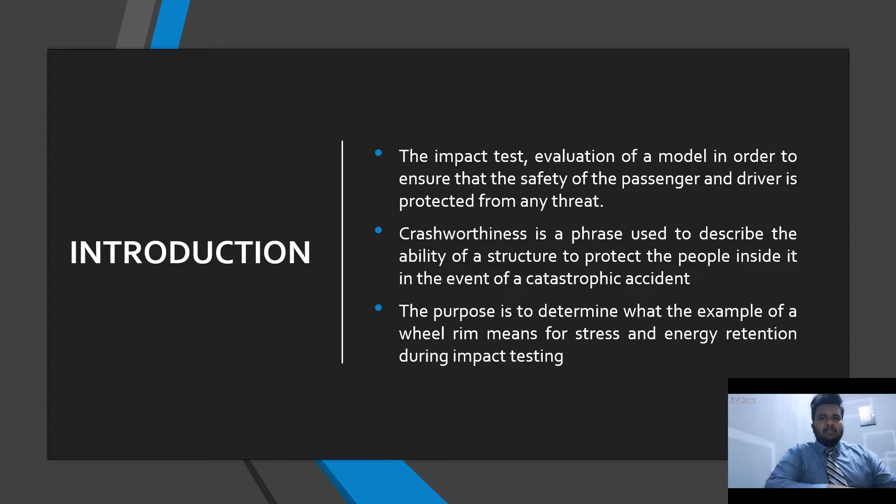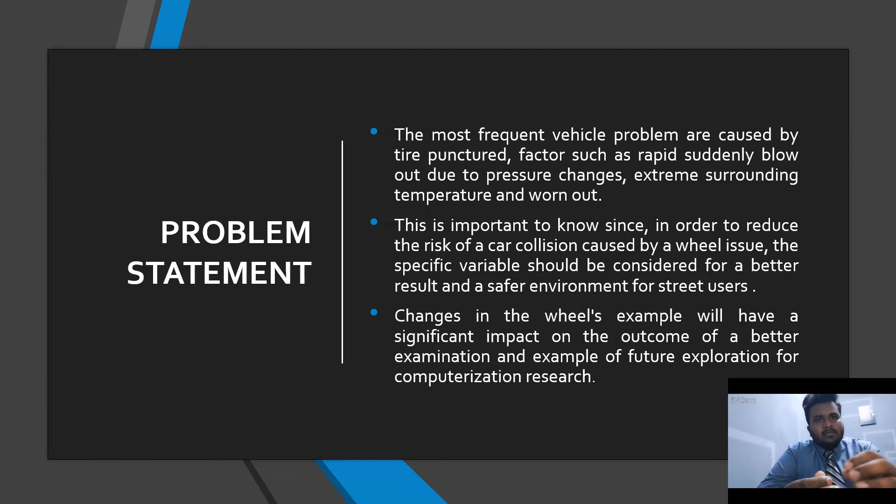The most frequent vehicle problems are caused by puncture tire. Factors such as rapid sudden blow due to pressure changes, extreme surrounding temperatures, and worn out. This is important to know since in order to reduce the risk of a car collision caused by a wheel issue, the specific variables should be considered for the better result and safer environment for street users.

Changes in wheels example will have significant impact on the outcome of a better examination and example of future exploration for computerization researchers.

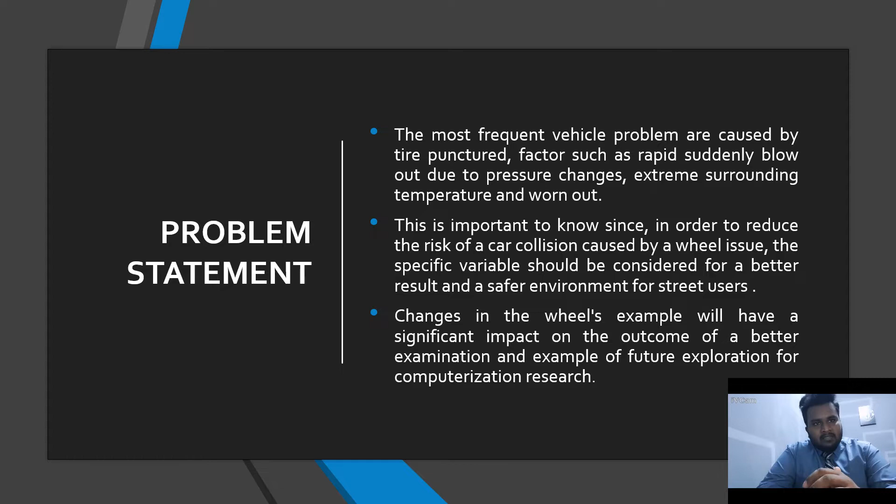The following are the project's objectives. First and foremost, to design the 3D model for alloy rim with a different pattern and different orientations. Besides that, to determine the energy absorbed with impact tests through different pattern and orientation. Last but not the least, to calculate and compare the final results of impact test.

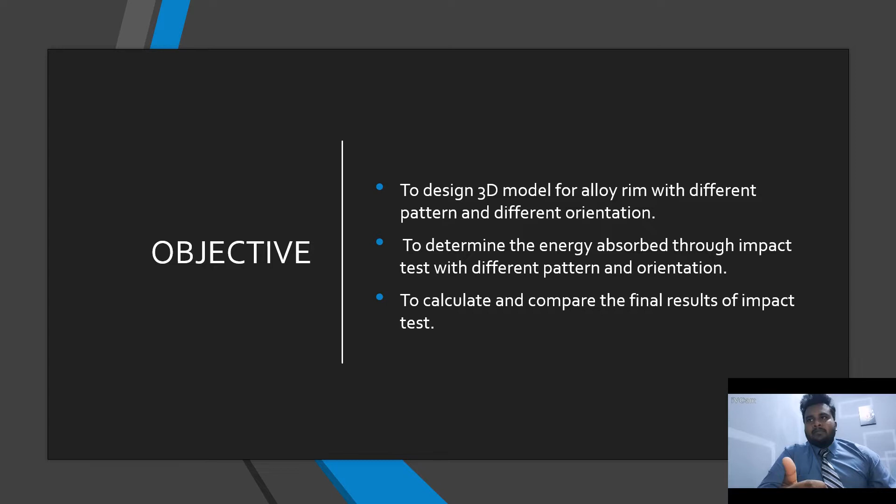The following are the project scopes. First of all, create a model of a wheel rim with a varying number of spokes and dimensions using CATIA V5 software. Then perform finite element analysis with Abaqus software to investigate the project's model.

To determine the amount of energy absorbed from impact test by the wheel rim with various spoke counts and orientations. Lastly, to determine the condition of a wheel rim under different conditions which can contribute to further related study.

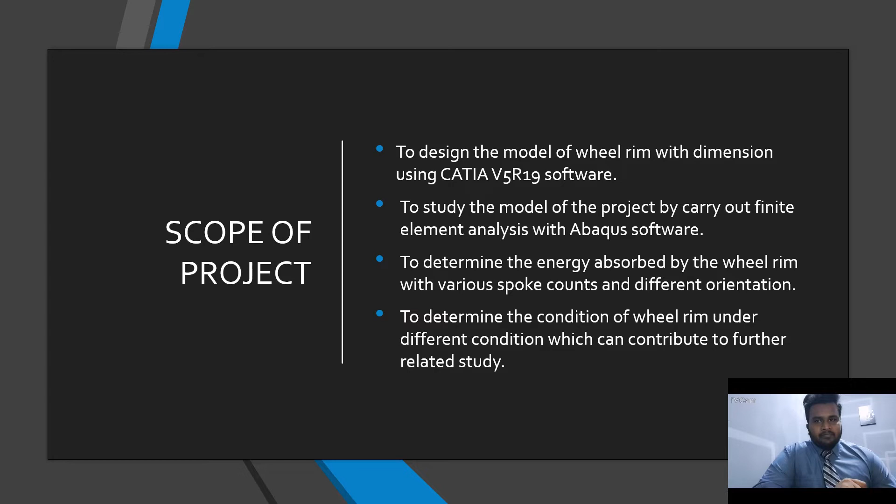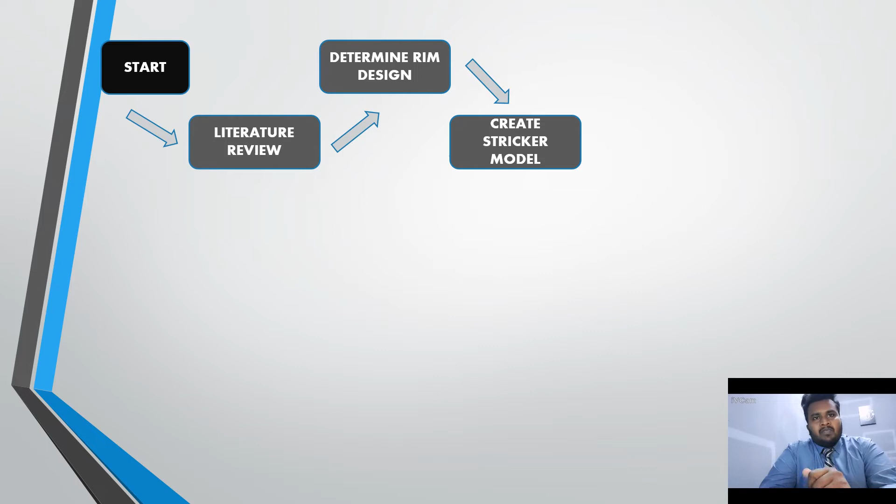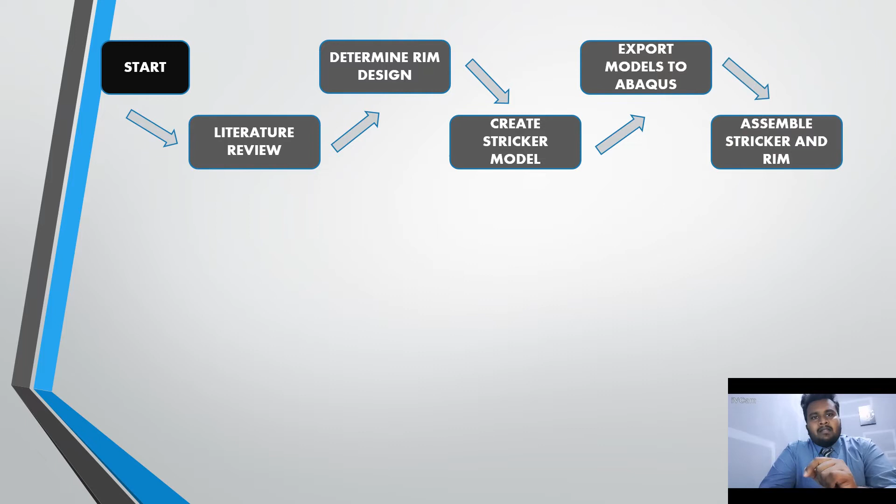Then the next step is to export all the models to Abaqus software. After exporting to the Abaqus software, the striker model and rims will be assembled for the following step. The following step is adding material and then setting all the parameters. Then for the important part, which is the simulation. If the simulation was a success, then we can move to the following step.

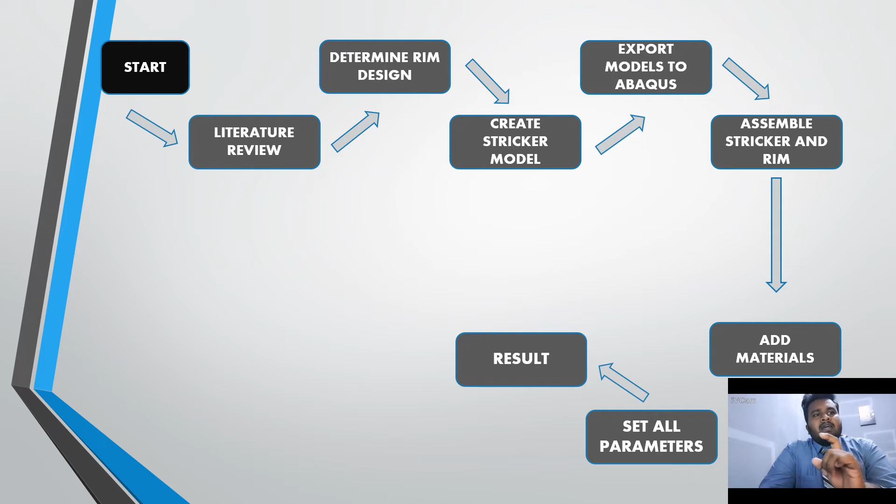If not, we need to start again from the assembling of the parts. If it is a success, then we can extract the results from the simulation for the result analysis. Finally, that's the end of the project.

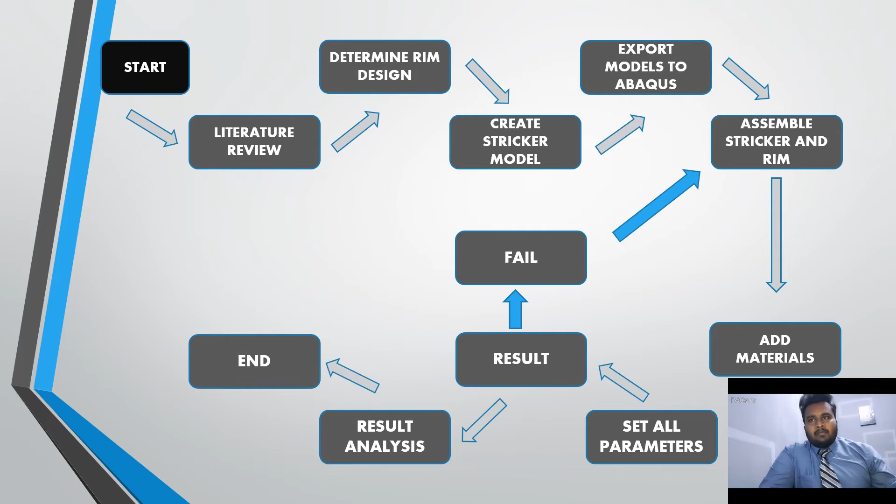For this project, the wheel rim design is based on my own family car, which is the Nissan Serena multipurpose vehicle. The original rim had five spokes and four bolts in it. The experiment will comprise three conditions of wheel,

which is a wheel rim with four spokes, as shown in the first picture, a wheel rim with five spokes, which is the original design, and a wheel rim with six spokes.

The major goal of this study is to determine the energy absorbed during the impact loading, the surface area of the striker's loading site, and the result of the simulation. The striker model for this study was designed with a V shape on its contact interaction with the rim. The stress applied by the striker model can be concentrated directly on the tip of the wheel rim with this design model.

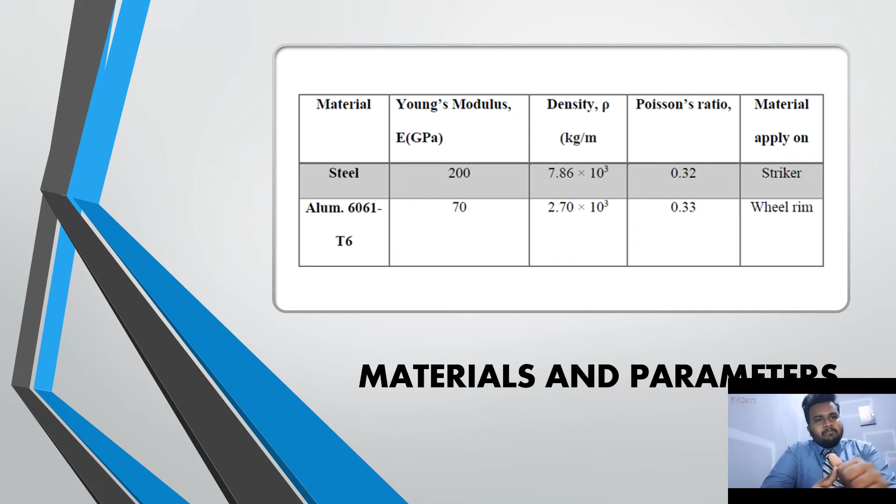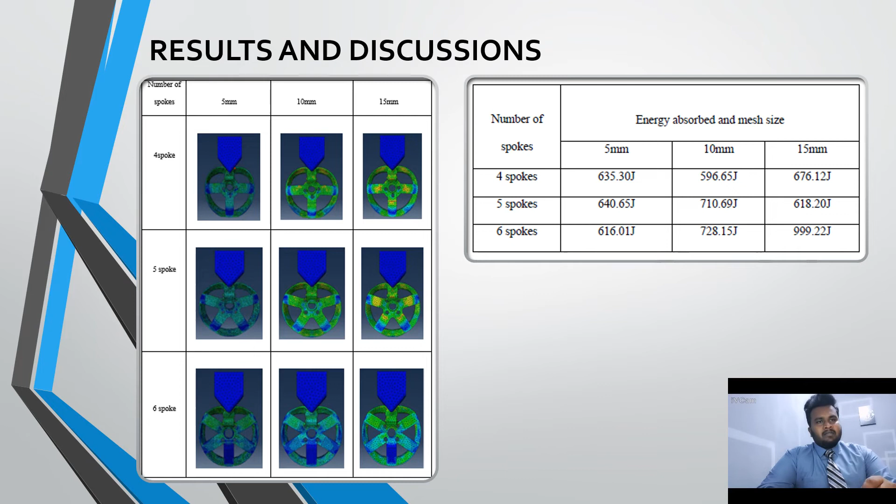The striker model has a speed of 22,202.22 millimeter per second and is directed to make contact with the wheel. The deformation occurs where the V-shaped striker comes into contact with the wheel rim, as shown in the table. The bar chart shows the energy absorbed by the wheel rim with varying number of spokes and the number of elements. The six-spoke wheel rim absorbs the most energy of all the wheel rims.

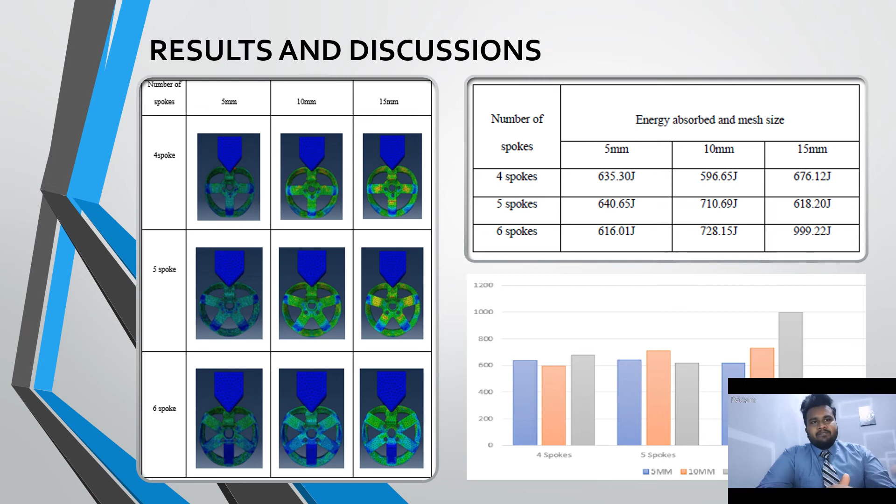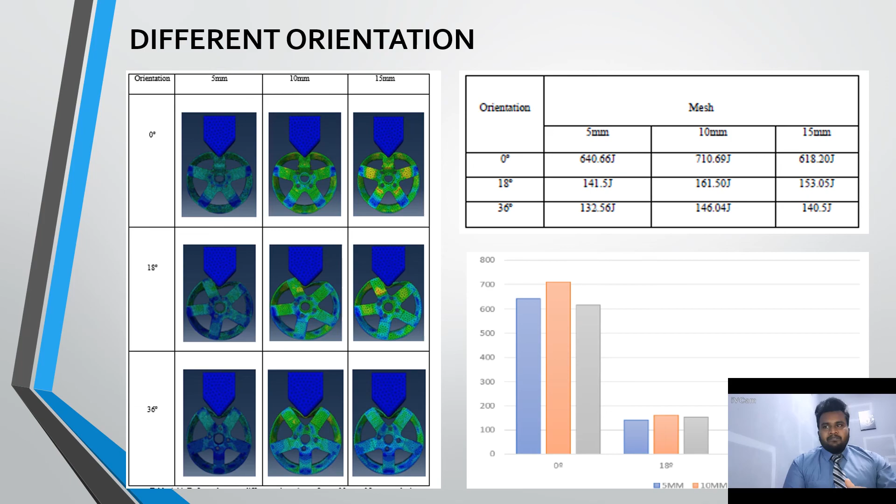The absorbed energy ranges from 596 joule to 999 joule, as indicated in the graph based on the energy absorbed by each wheel rim with varied number of spokes. The percentage difference derived from the simulation is less than 15%, implying that the amount of energy absorbed remains nearly constant as mesh size lowers. In contrast, the percentage difference of 0 degree, 18 degree, and 36 degree were also obtained for comparison purpose.

The area of contact between the wheel rim and the striker model, as well as the different orientations involved, are the reason for this clear result. The vast disparity in energy absorbed during the simulation is due to the area of contact between the wheel rim and the striker model in the study, which is the shape of striker model, which is V-shaped.

The location of impact in the 0 degree orientation is positioned in the center of the spokes, with the support of the spoke allowing more energy to be absorbed from the simulation, whereas the 18 degree and the 36 degree positions are located in the gap between the spokes with no support from the spokes. As a result, there is noticeable variation in the amount of energy absorbed.